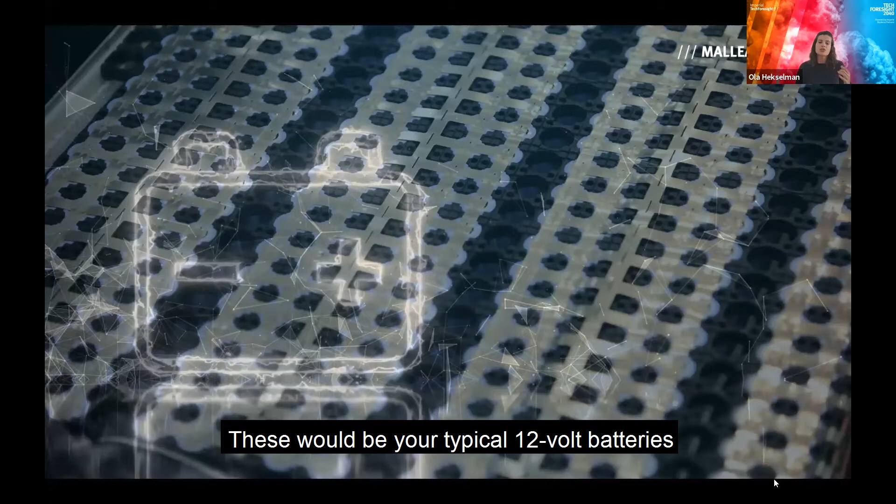So about 2 years ago, I started looking for comparable examples of battery recycling, and I came across lead-acid batteries. These would be your typical 12-volt batteries, which can be found in every internal combustion engine car. Interestingly enough, not many people would know that lead-acid batteries are also used in every state-of-the-art hybrid and electric vehicle.

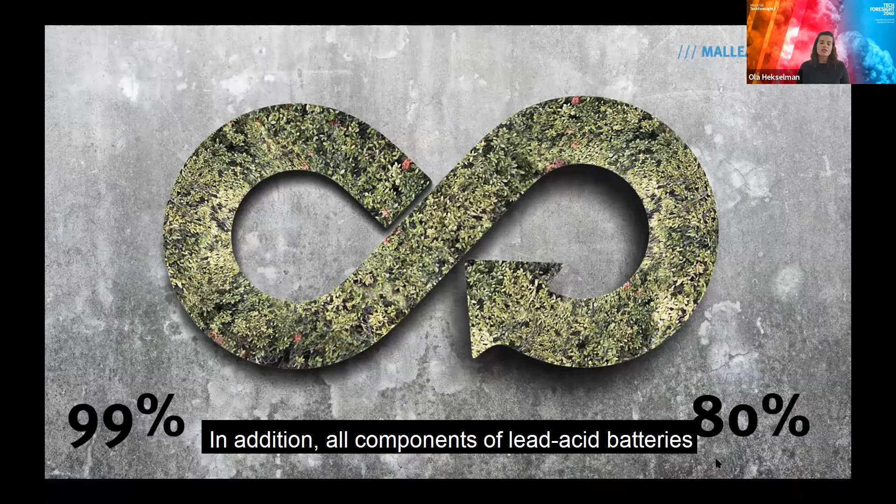Unlike with lithium-ion batteries, there is not much hype around lead-acid technology, mainly because it's been on the market for about a century. What is remarkable about this technology, however, is that 99% of these batteries are being collected and recycled at their end of life. In addition, all components of lead-acid batteries can be recycled and reused in a new battery. Did you know that 80% of your new car battery is made of recycled materials?

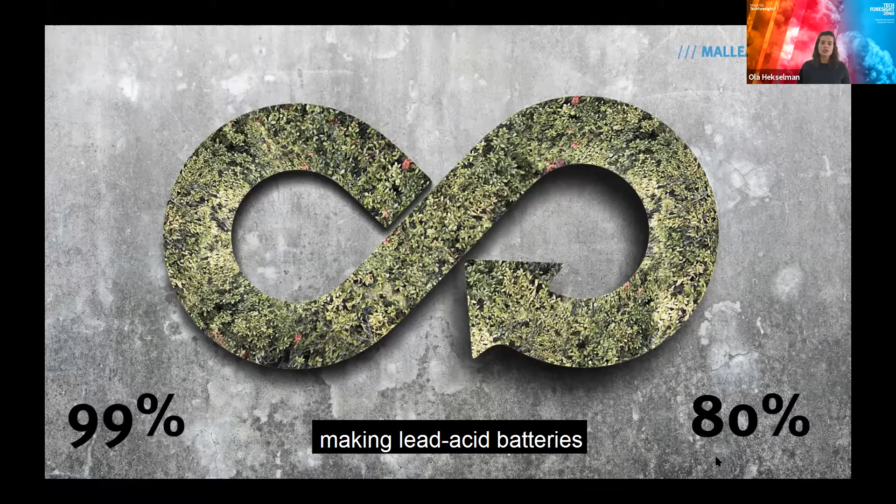This is outstanding, not only when compared to other battery technologies, but also in comparison to any other recyclable product. Their recycling rates exceed those of paper, glass, or aluminum cans, making lead-acid batteries the most recycled consumer product in the world. This is thanks to various factors: the infinite recyclability of lead, the cost of raw materials, the simplicity of the product, and the enforcement of environmental regulation.

This market is considered a perfect example for circular economy. But it is not free from issues and challenges. We all know that lead is highly toxic. Exposure to lead affects all organs in the body and often causes irreversible health issues. Long-term exposure to lead can be associated with cognitive impairment, behavioral problems, lower IQ, increased societal violence, and lower life expectancy.

Today, human exposure to lead comes primarily from informal recycling of lead-acid batteries in low and middle-income countries. And it is estimated that up to 30% of children around the world might be suffering from lead poisoning. For that reason, informal lead recycling is considered the most polluting industrial process in the world.

The existing method of recycling of lead-acid batteries includes crushing, separation of materials, and smelting. Smelting is a high-temperature combustion process done at 1100 centigrade, and it is the most energy-intensive and polluting step in the whole recycling process. It is also the most expensive step, because if it's done properly, it may cost companies up to 40% of their annual expenditure just to comply with environmental regulations. At present, there is no industrial recycling process on the market that is both cheap and environmentally friendly.

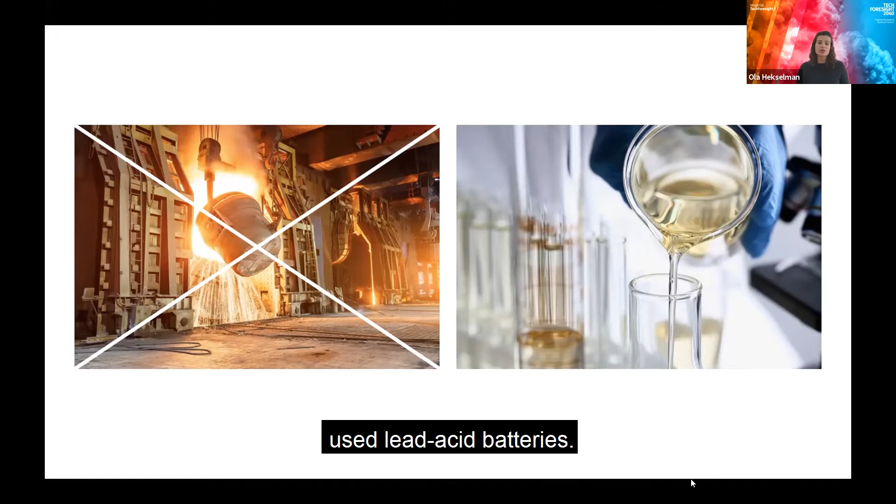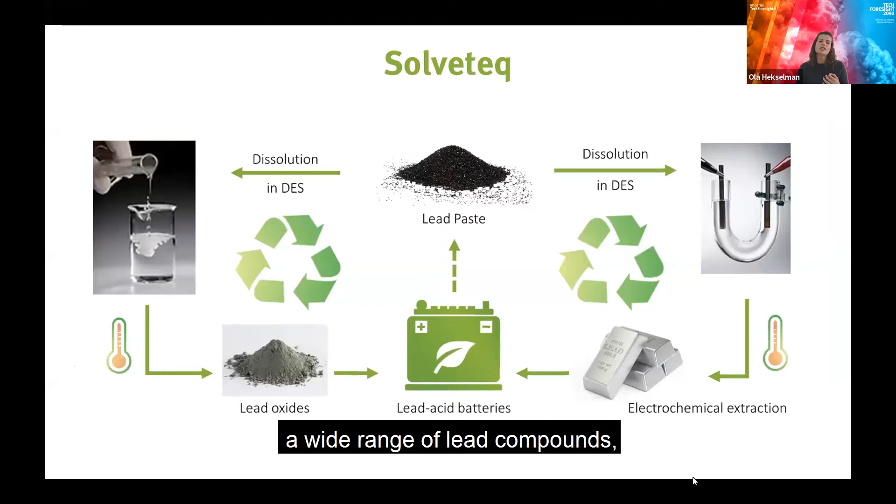Deep eutectic solvents are composed of low-cost, easily available, and benign chemicals, such as ethylene glycol. They have a low environmental impact and are easy and safe to handle. Most importantly, they have the ability to dissolve a wide range of lead compounds, including components of used lead-acid batteries, which are otherwise difficult to dissolve, or are even insoluble in other liquid media.

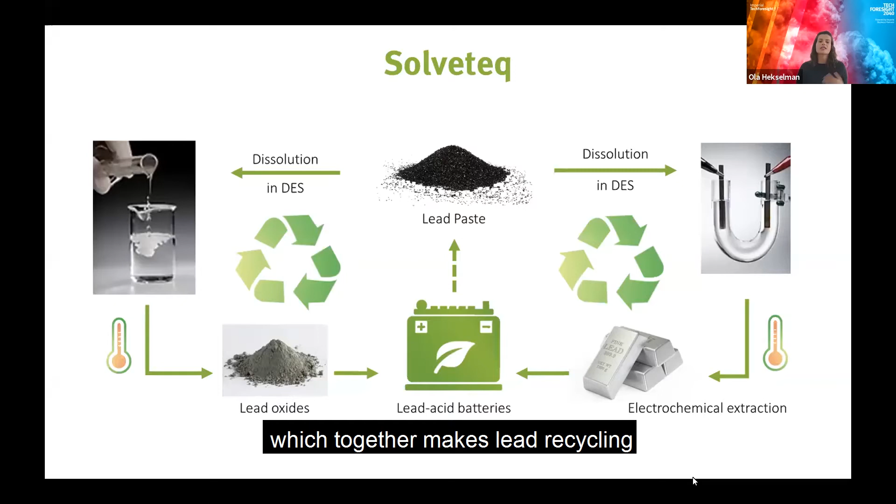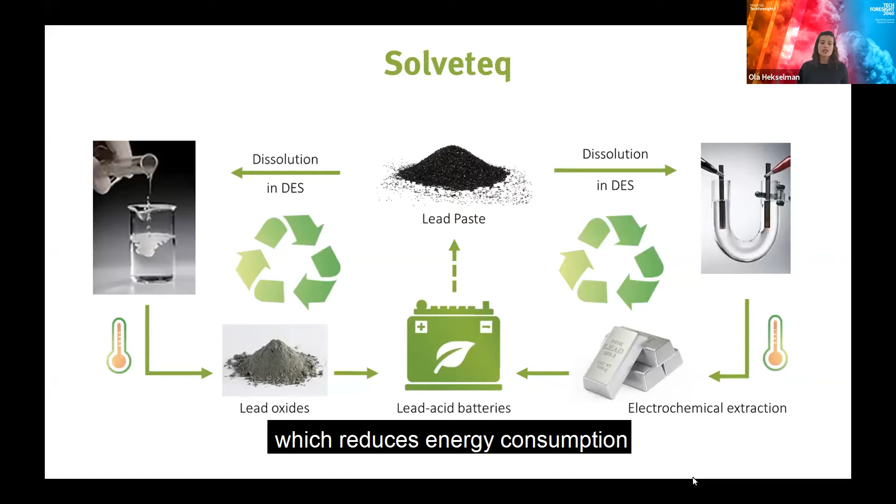Our process is solvent-based, so we produce significantly less hazardous air pollutants during the process. We also significantly reduce CO2 emissions, which together makes lead recycling more environmentally friendly. We also move from smelting at 1100 degrees to temperatures as low as room temperature, which reduces energy consumption and makes the entire process much cheaper than smelting. Finally, we are also faster because we require fewer steps to produce lead products that can be used in new lead-acid batteries.

As I said, there is no lead recycling process on the market that is both cheap and environmentally friendly. But our technology has potential to address this environmental, societal, and economic issue. To fully maximize impact of our research at Imperial, my colleagues and I decided to set up Solveteq, a spin-out company dedicated to the commercialization of this technology.

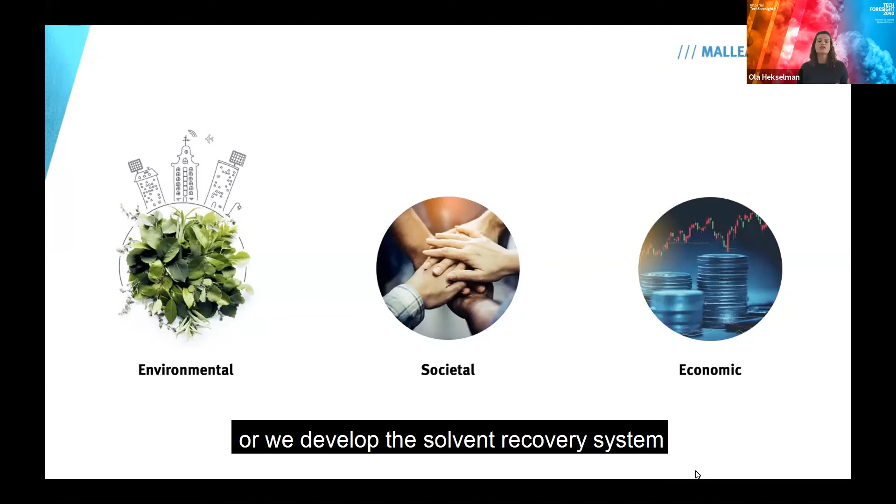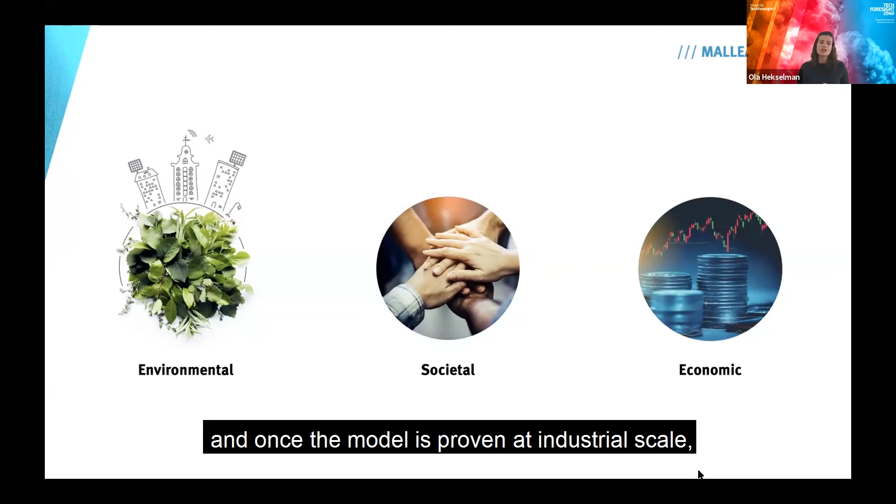We work very closely with established industrial partners, recycling experts, and our future customers to meet commercial requirements. And this is a very exciting part of the journey for our team because it gives us an opportunity to look at our process beyond the laboratory scale. We analyze the economics of our process, or we develop the solvent recovery system to minimize the production of chemical waste. Currently, the technology is at the prototyping stage, and once the model is proven at industrial scale, the technology will be deployed worldwide.

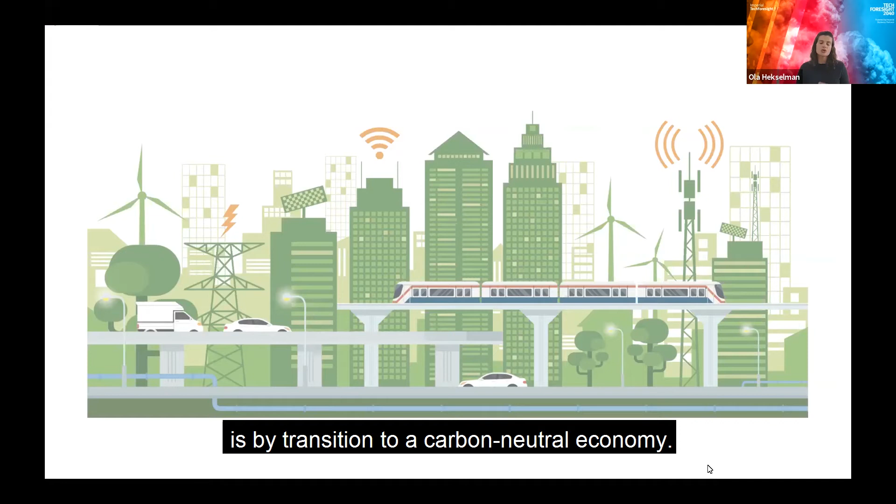And while this is already greatly exciting, the future is even more interesting. It is widely recognized that climate change is the most serious and threatening global environmental problem. One of the ways this challenge can be addressed is by transition to a carbon neutral economy. And an increasing number of countries and organizations are already targeting net zero emissions by 2050 or even earlier.

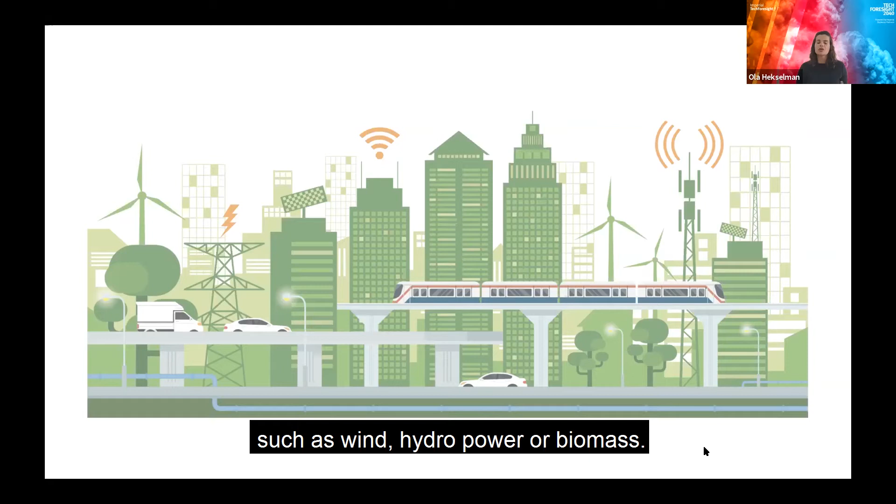From a wider economy perspective, this can be done, for example, by moving away from fossil fuels to electricity generated from renewable energy sources, such as wind, hydropower, or biomass. Another option is reduction of greenhouse emissions generated by our transport system. EVs are a great option for reducing our carbon footprint in comparison to standard petrol or diesel engines.

The electric vehicles market has grown steadily in the last few years, reaching sales of 2.5 million units in 2019, which is slightly less than 3% of total vehicle sales. However, the real takeoff for EVs is expected to happen from the second half of the 2020s, when electric cars are expected to become cheaper to own than internal combustion engine models.

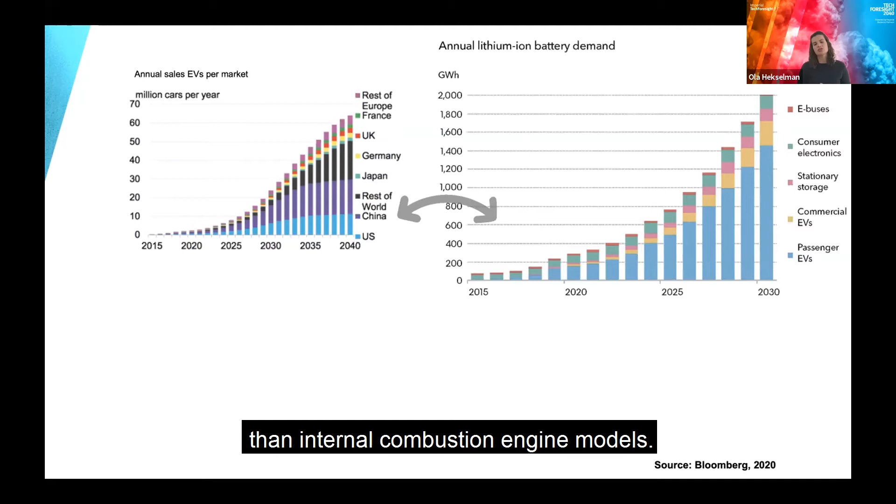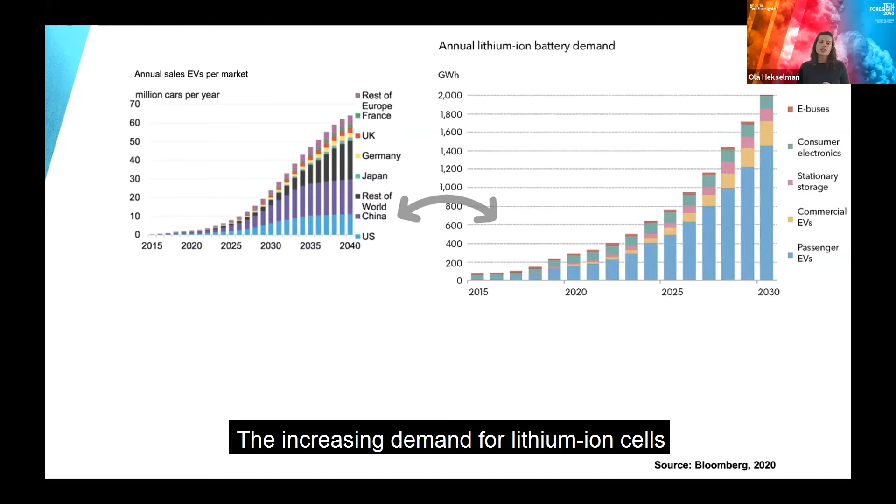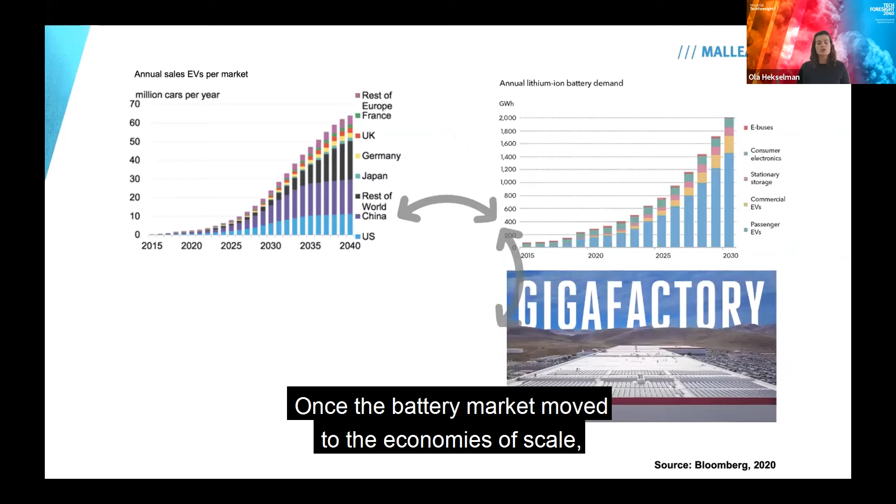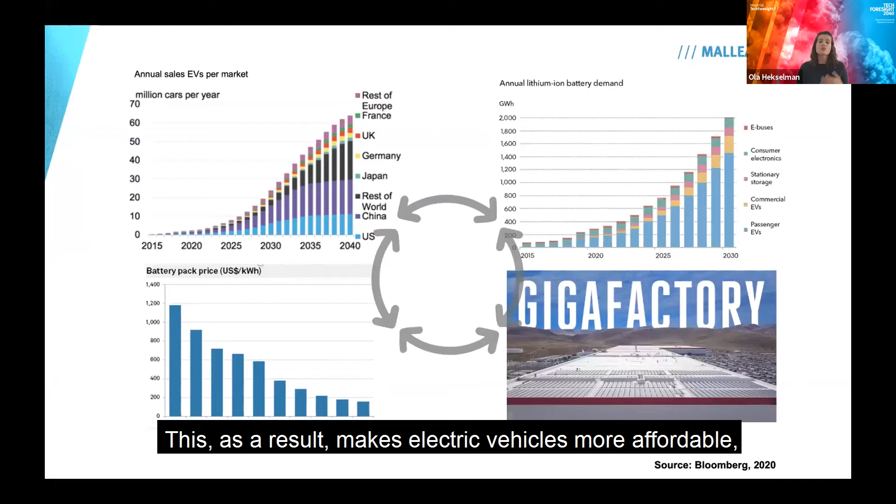The electric vehicle revolution is responsible for surging battery demand. Today, the size of the lithium-ion market is driven by expansion of the plug-in hybrid and electric vehicle market. The increasing demand for lithium-ion cells is met with an increasing number of gigafactories, which are built around the world. Once the battery market moved to the economies of scale, we started to observe the drop in battery prices. This, as a result, makes the electric vehicles more affordable, which then further increases demand for batteries.

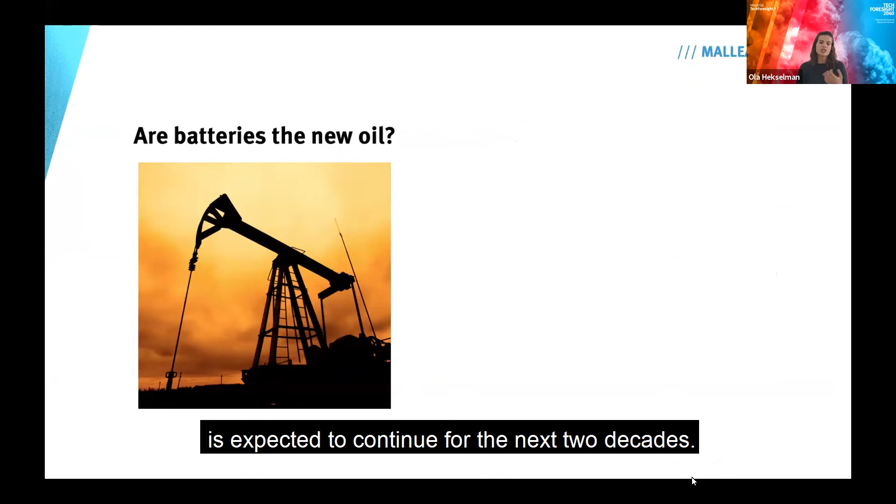This spectacular success of batteries and electric vehicles is expected to continue for the next 2 decades. This unprecedented demand can be only compared with the demand for oil in the 1910s and 1920s. One could ask then if batteries are the new oil. However, this success also puts an enormous strain on the entire supply chain. To meet this demand, we will need to produce more and more batteries. But we only have a finite amount of resources. If we continue expansion at this speed, we will soon run out of raw materials such as lithium or cobalt.

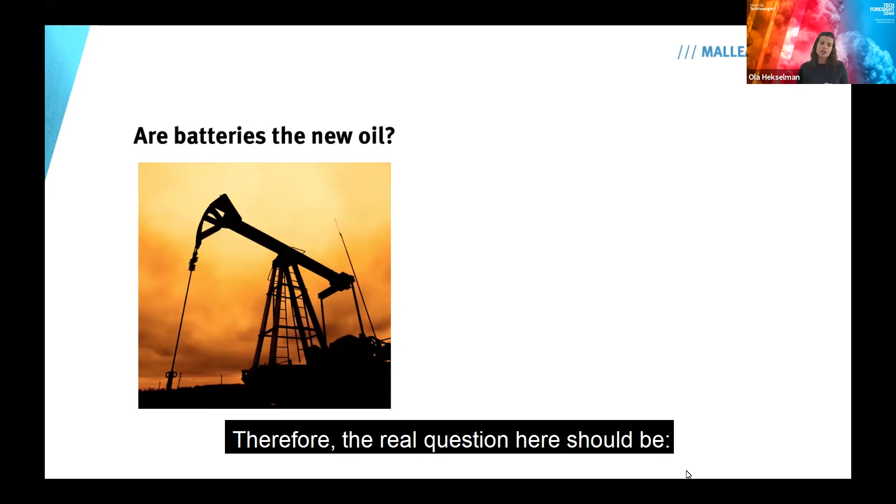Therefore, the real question here should be, are batteries the new oil or the new plastic? The answer to this question is around sustainability. We have to build our sustainability map for lithium-ion batteries, and we have to build it now. And we all have a role to play here, starting from us, material scientists, engineers, car manufacturers, regulators, all the way to all of us consumers. We can contribute to making batteries more sustainable.

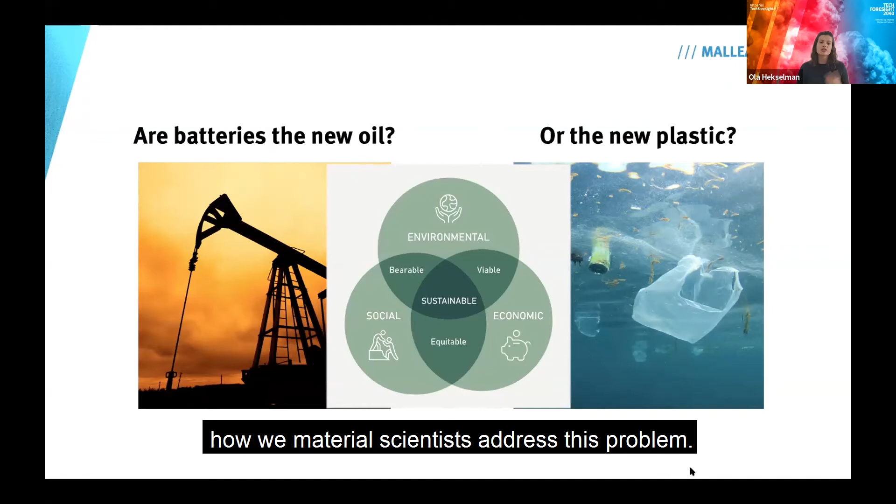For the last few minutes, I will share with you how we material scientists address this problem. First and foremost, we shall make our batteries safer, more efficient, and last longer. For the first example, I've chosen a material that is responsible for making battery headlines in the last few weeks. It is a cathode material called NMC, which stands for lithium nickel manganese cobalt oxide.

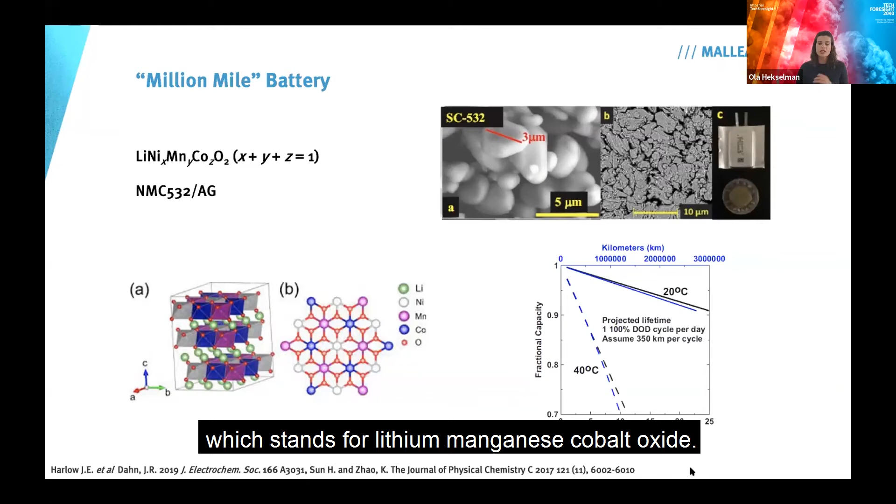These materials have a layered crystal structure, which allows a facile intercalation and deintercalation of lithium ions upon charge and discharge of the battery. The original layered material here was lithium cobalt oxide, and it was successfully used early on in small portable electronics. However, cobalt is more expensive and less abundant than other transition metals. Cobalt also presents political and ethical issues because of the way it is mined in Congo.

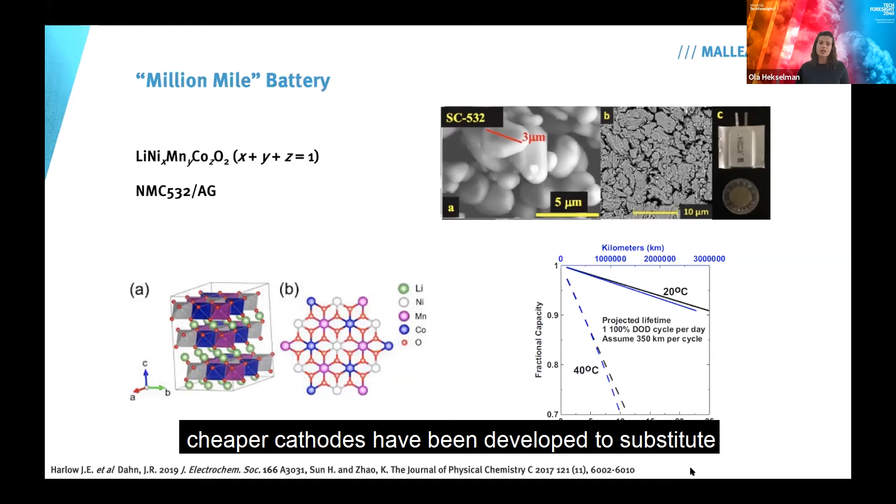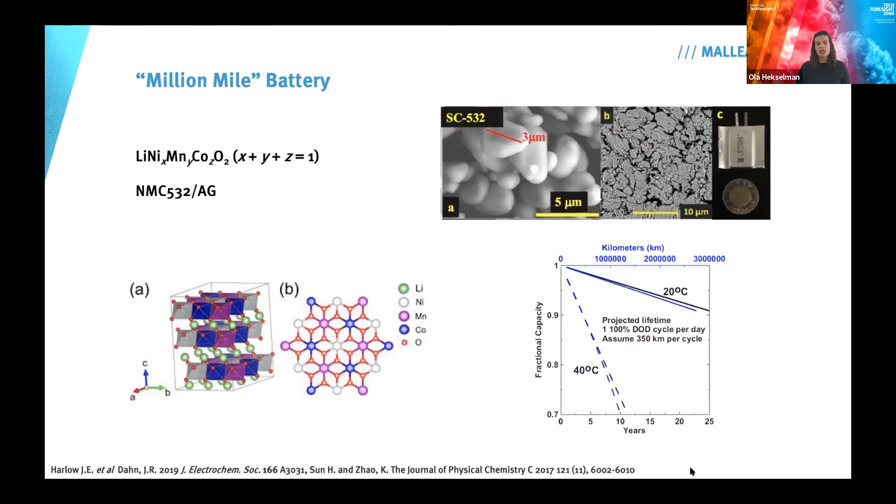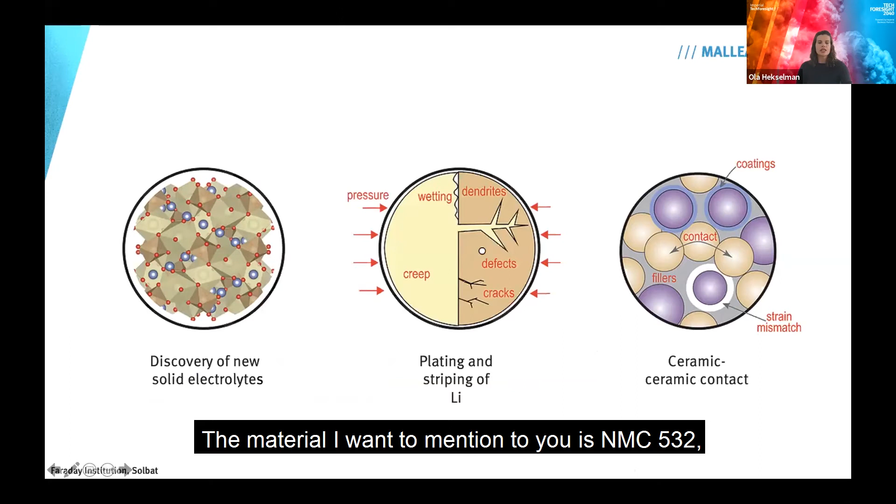As a result, cheaper cathodes have been developed to substitute some of the cobalt with nickel and manganese. These are used in the majority of lithium-ion batteries in electric vehicles, due to their high specific capacity, ease of production, and moderate cost. The material I want to mention to you is NMC 532, where 5, 3, and 2 correspond to atomic ratios between nickel, manganese, and cobalt.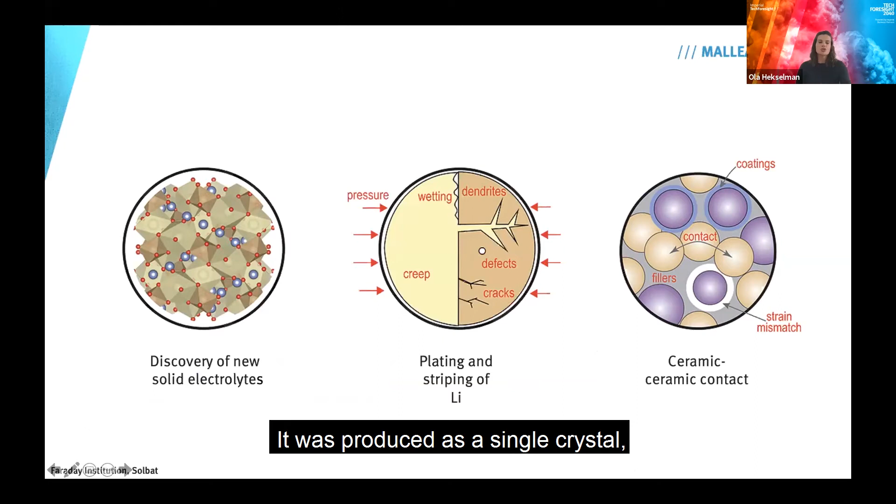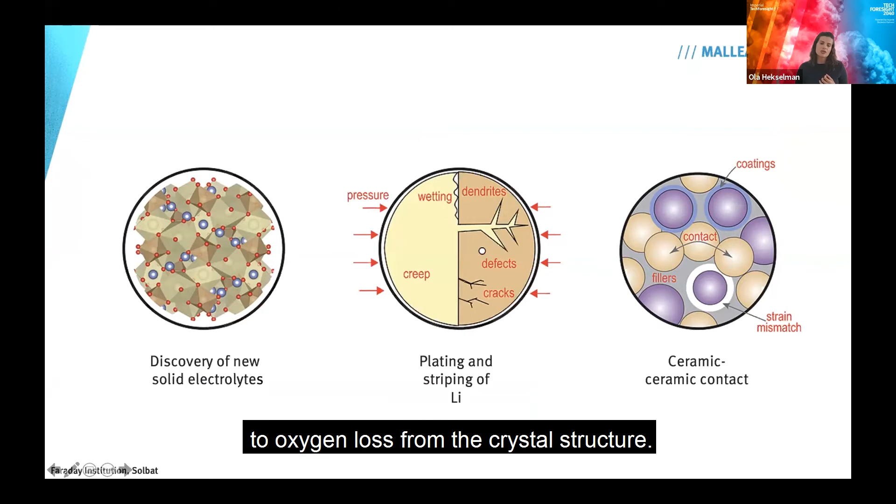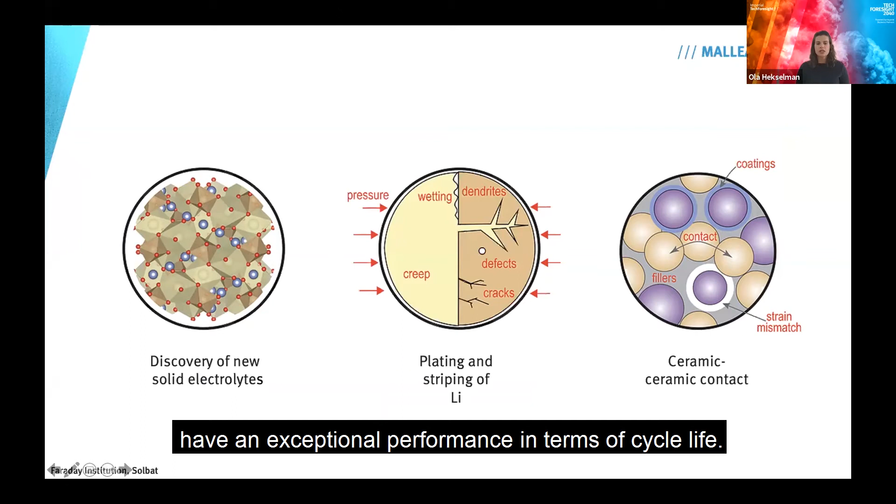It was produced as a single crystal, unlike other cathode materials, which are typically polycrystalline. This made NMC 532 extremely resistant to oxygen loss from the crystal structure, and as a result, lithium-ion cells with NMC 532 have an exceptional performance in terms of cycle life. These new batteries would last for over 16 years and over 1 million miles. This work was done by Professor Jeff Dahn and his group from Dalhousie University in Canada. Jeff is also known for his close collaboration with Tesla, which announced that they will be implementing a game-changing battery technology later this year.

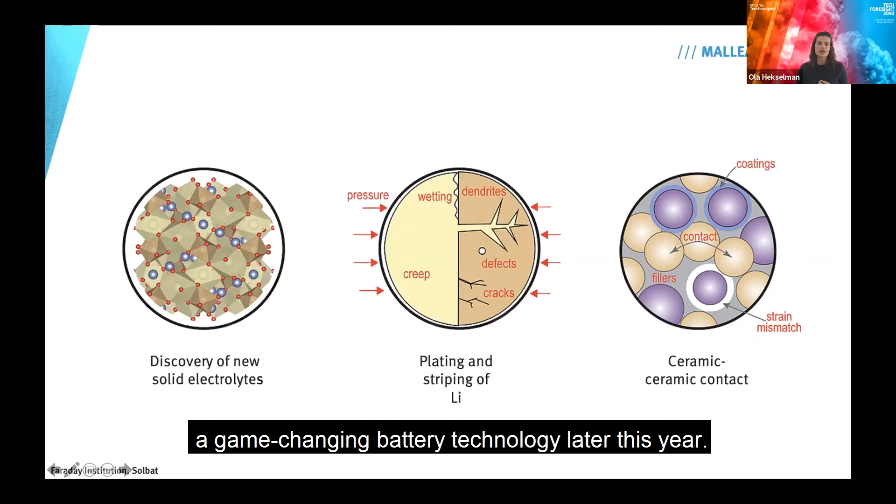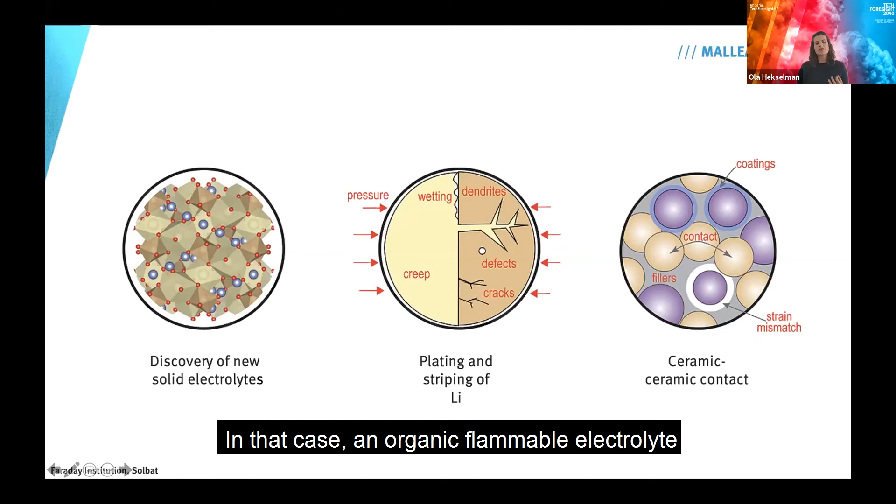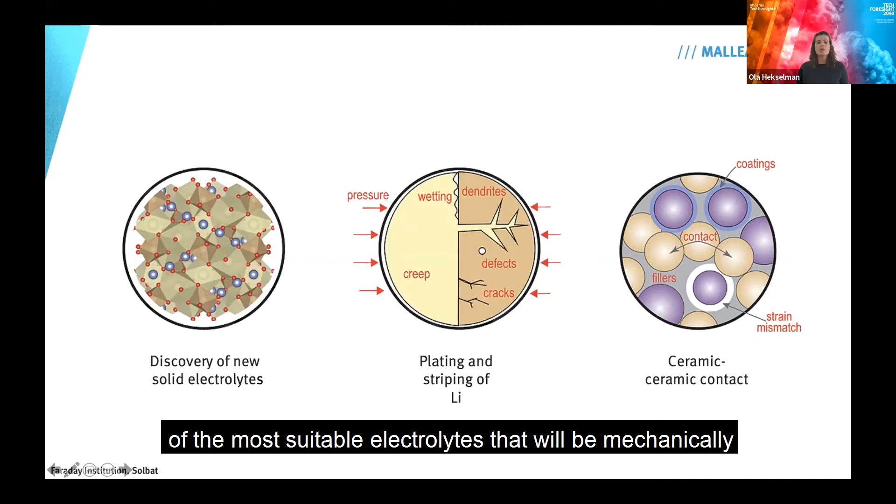Another example of making batteries more sustainable would be solid-state batteries. In that case, an organic flammable electrolyte and graphite-based anode would be replaced with a ceramic electrolyte and a lithium metal anode. This would increase the range of the battery and address the safety concerns. Currently, research efforts are focused on discovery of the most suitable electrolytes that will be mechanically and chemically stable with lithium metal, and will provide intimate contact with the active cathode material upon charge and discharge.

But actually, I'm not sure if it's changing.

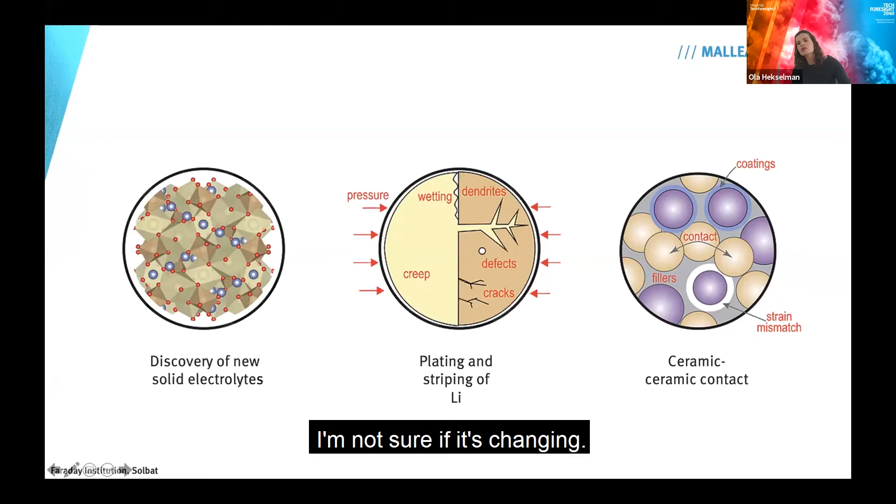Okay, great. But actually, there is already a battery technology on the market that works with metallic lithium. This is the lithium sulfur battery, where an anode is made of lithium and a cathode comprises elemental sulfur. Both lithium and sulfur are extremely light materials, delivering high energy batteries. This is suitable for applications where weight is critical, for example, aerospace. Moreover, sulfur costs approximately $200 per ton, which is much cheaper than cobalt, for example. It is also much safer to work with, and there are no heavy elements involved, which positions this technology strongly on the sustainability scale.

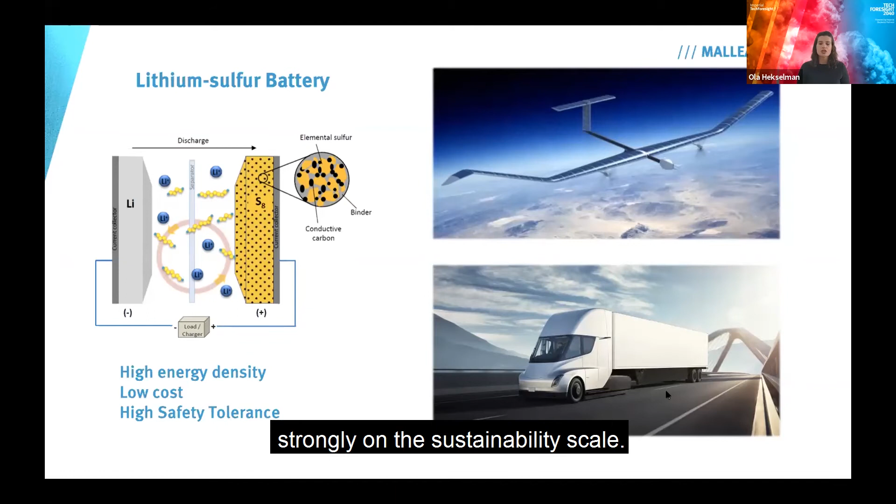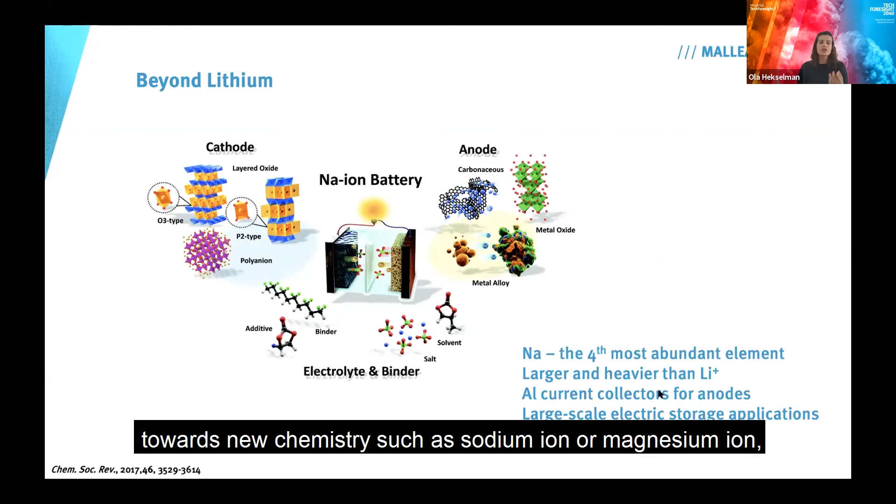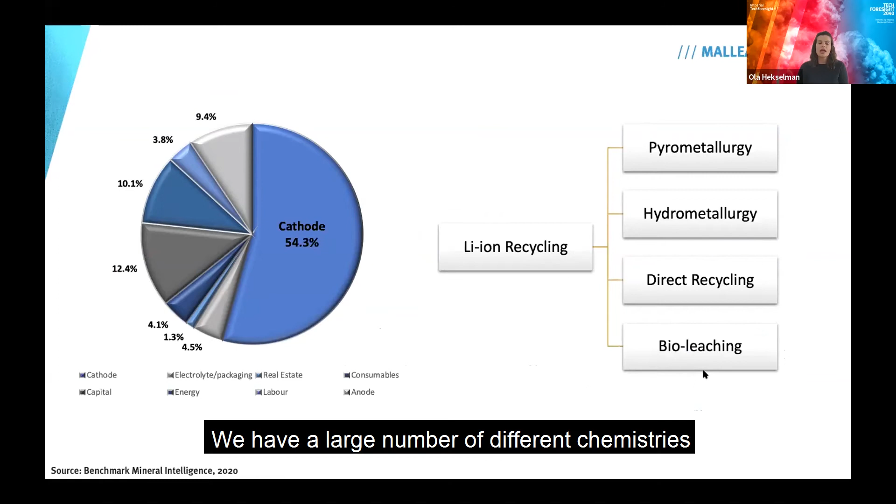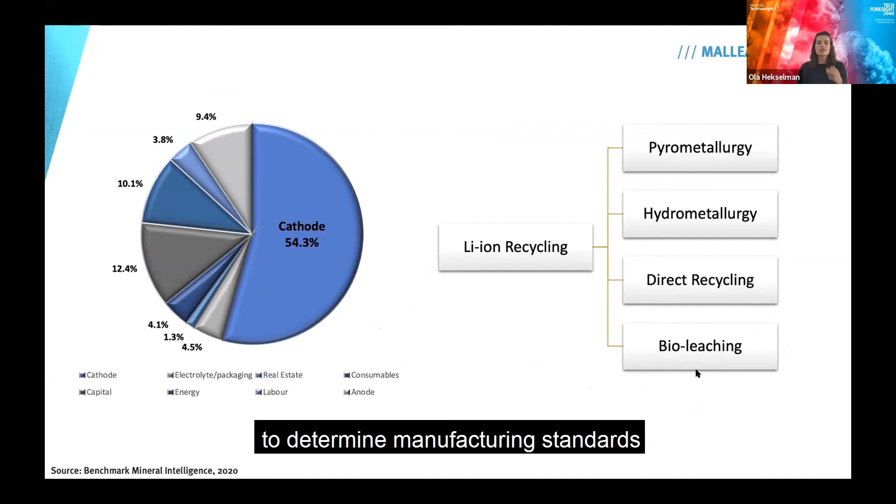Then, we also have to look beyond lithium and lithium-ion. There is currently a lot of work done towards new chemistries, such as sodium-ion or magnesium-ion, where materials are cheaper and more abundant. And of course, the sustainable recycling of batteries at their end of life. However, this is extremely difficult to establish at this point in time. We have a large number of different chemistries on the market. Elemental composition of batteries varies greatly, and there is no sufficient legislation in place to determine manufacturing standards, collection, or recycling. But for the time being, the clues are in the cost of lithium cells.

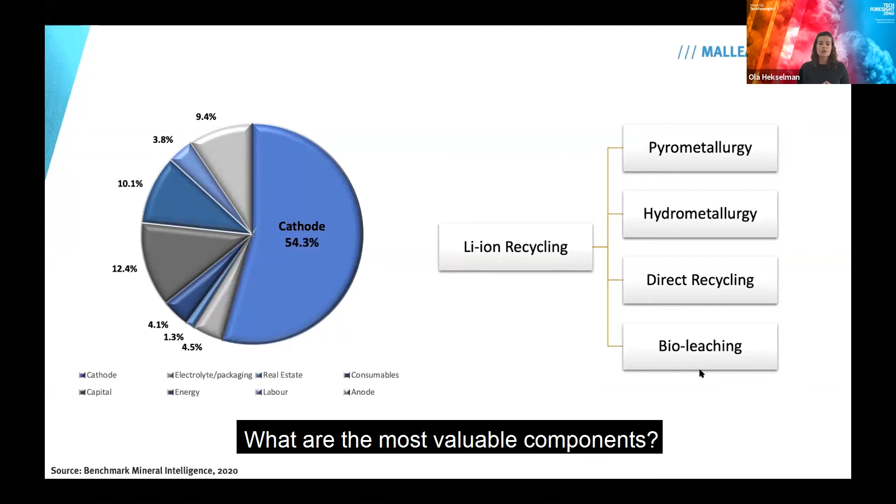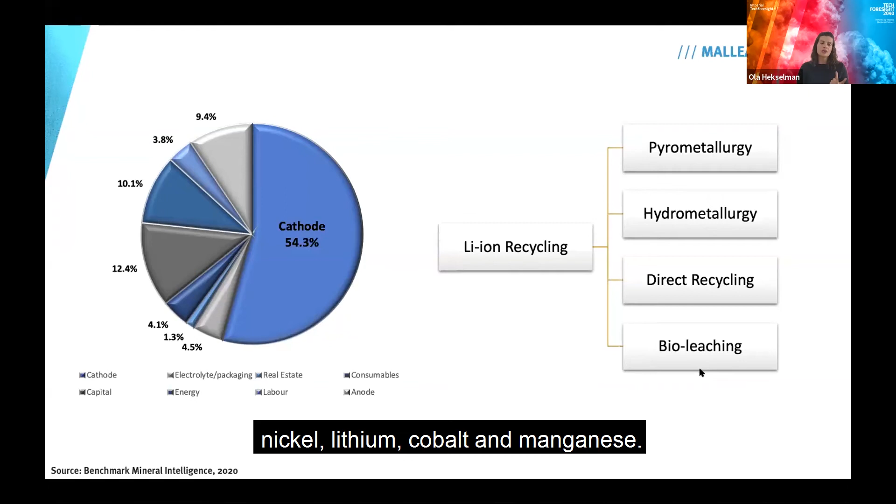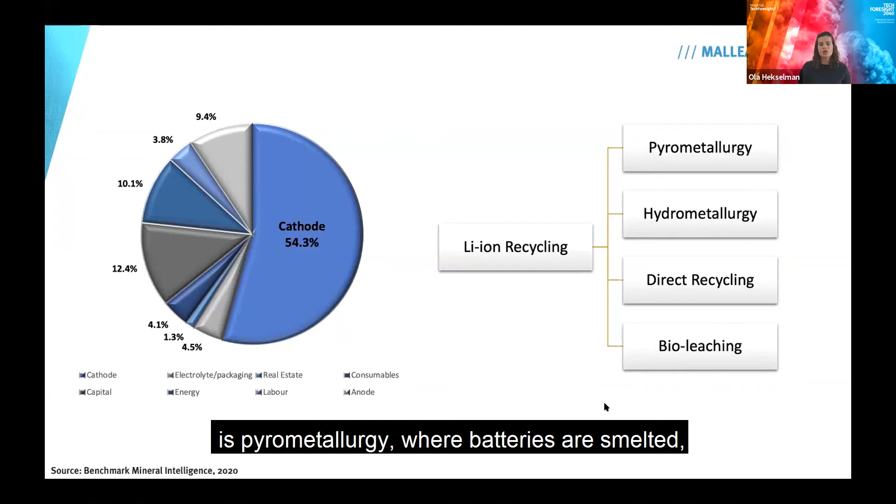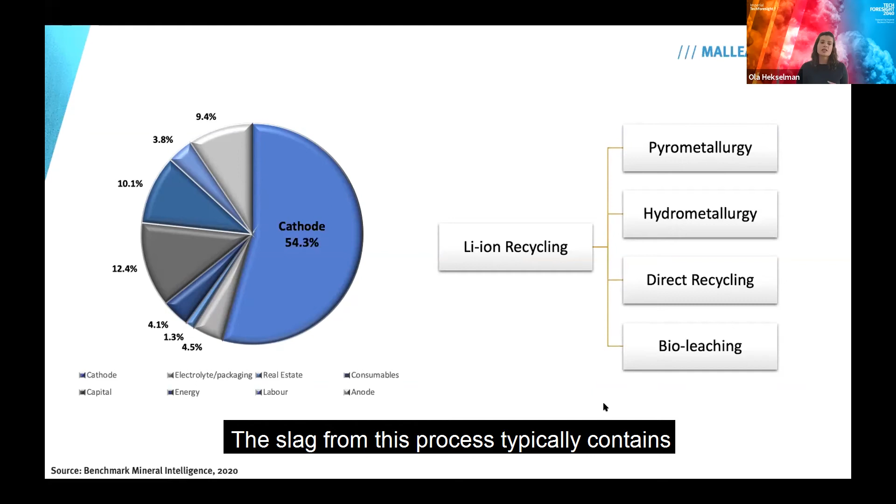What are the most valuable components? From this breakdown, one can see that over 50% of battery value is in its cathode materials: nickel, lithium, cobalt, and manganese. Not surprisingly, the most advanced method of lithium-ion recycling today is pyrometallurgy, where batteries are smelted and produce alloys of copper, cobalt, iron, and nickel. The slag from this process typically contains aluminium, manganese, and lithium, which can be reclaimed by further hydrometallurgical processing. But electrolytes, plastic, and lithium salts are usually lost in the process.

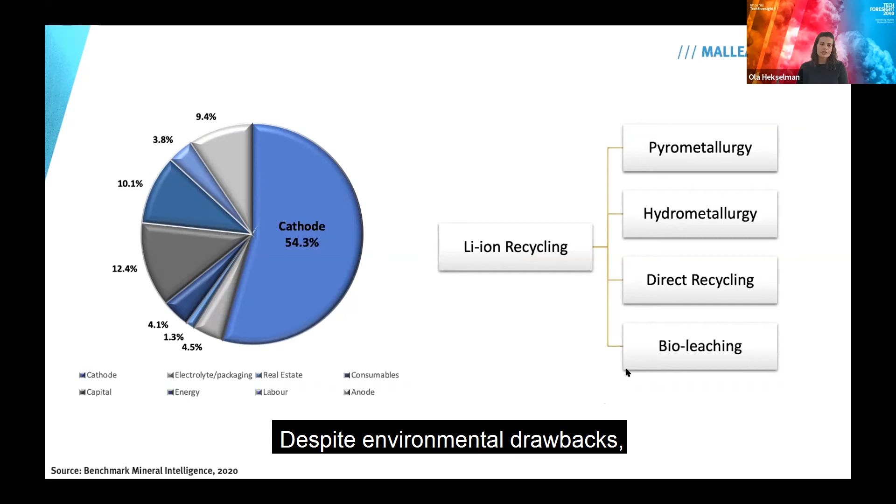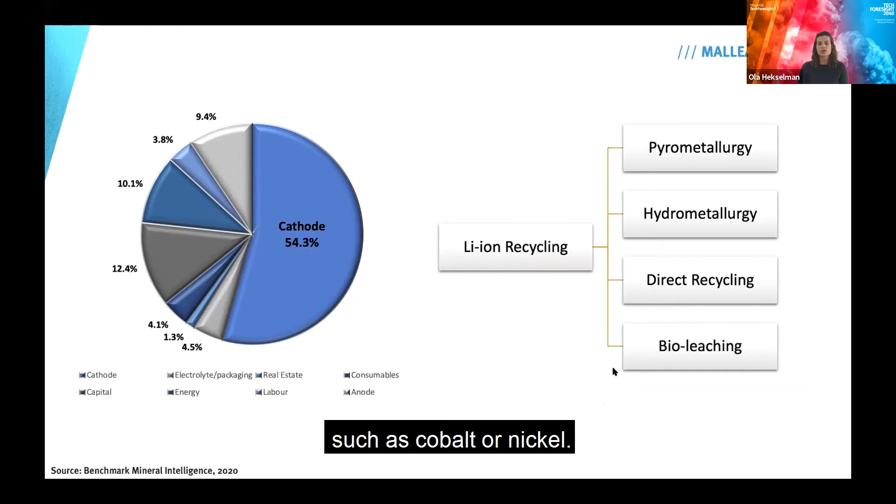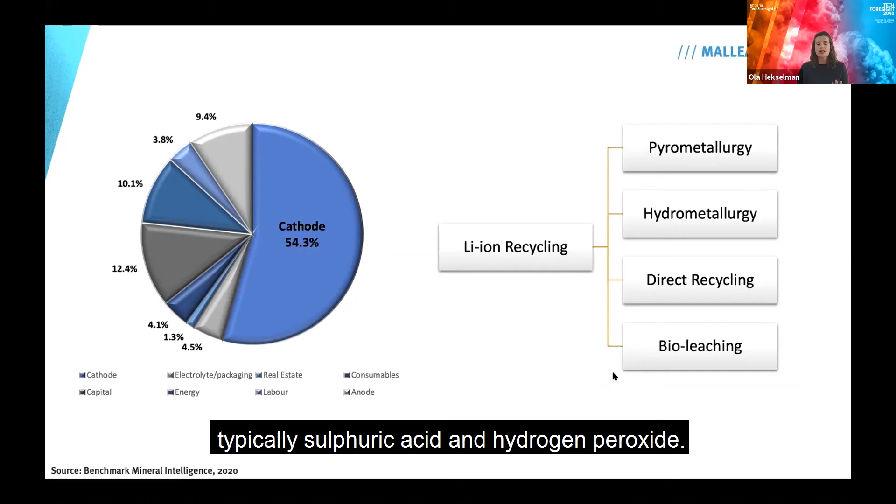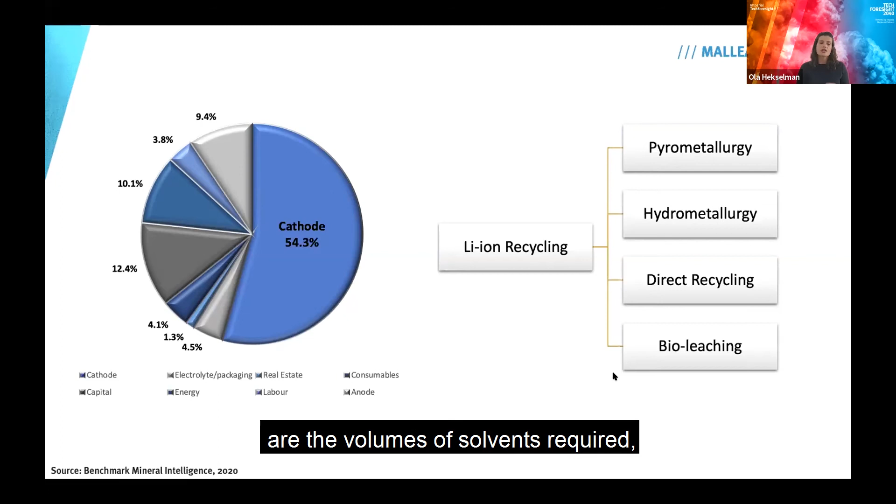Despite environmental drawbacks, high energy costs, and the limited number of materials reclaimed during pyrometallurgy, this is a frequently used process to reclaim high-value transition metals such as cobalt or nickel. Hydrometallurgy involves the use of aqueous solution to leach metals from cathode materials, typically sulfuric acid and hydrogen peroxide. Subsequently, metals go through precipitation reactions to recover cobalt and lithium, or transition metals, or NMC. The big issues to be addressed with all hydrometallurgical processes are the volumes of solvent required, the speed of delamination, the cost of neutralization, and the likelihood of cross-contamination of materials.

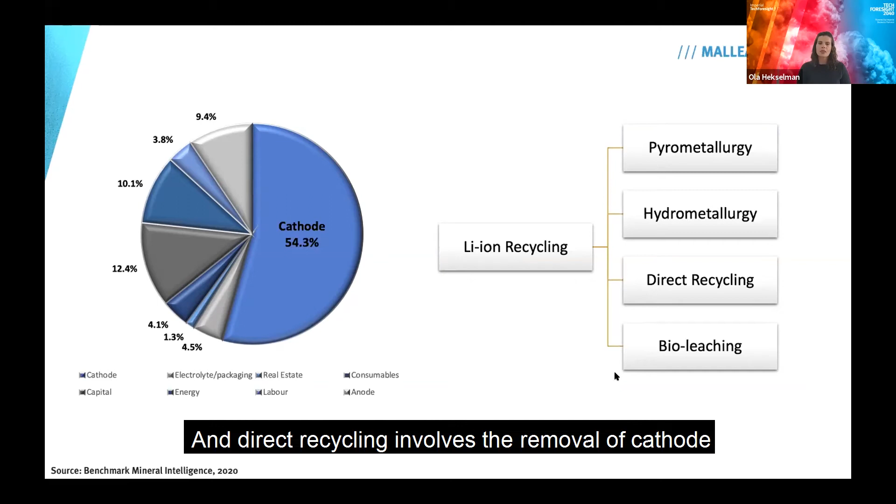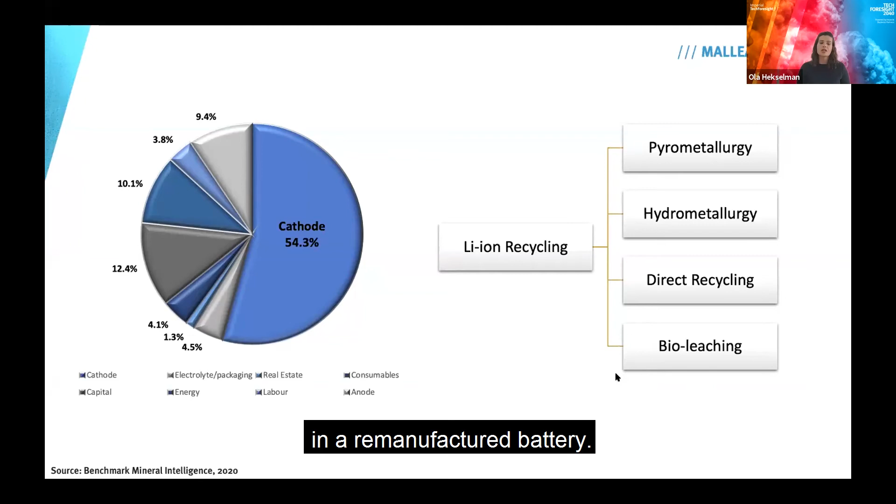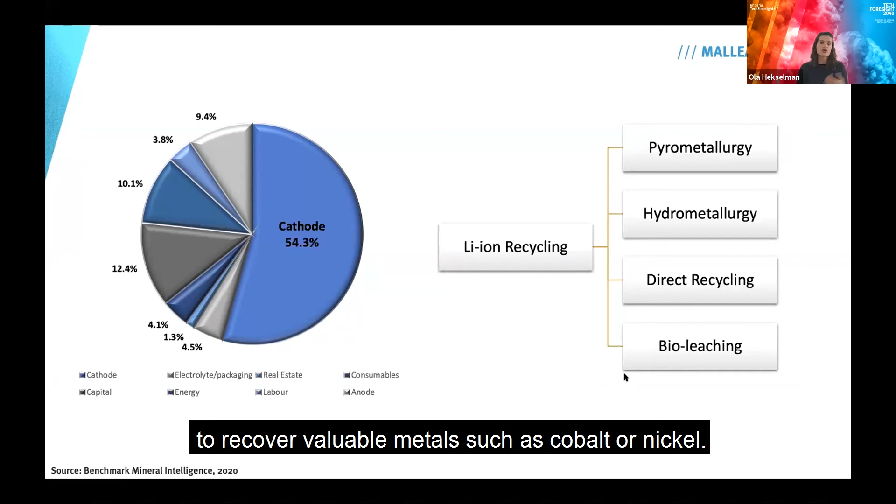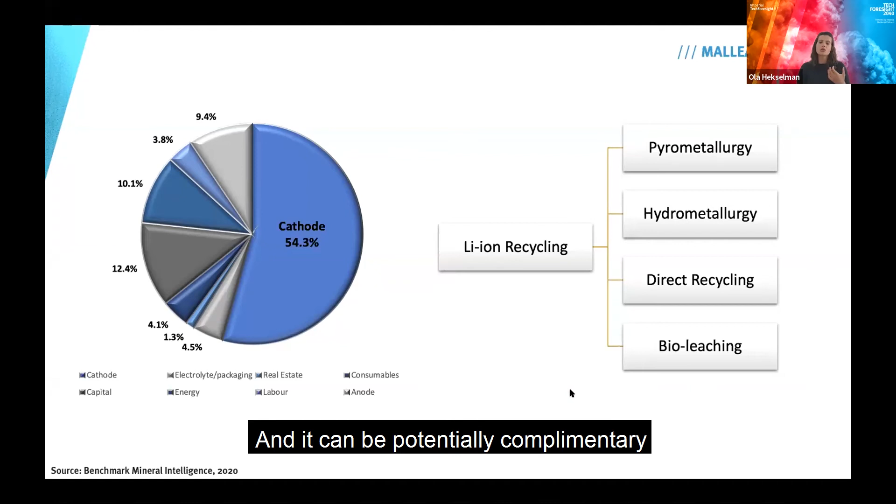And direct recycling involves removal of cathode or anode material from used batteries, followed by reconditioning and reuse in a remanufactured battery. For example, after dismantling used batteries, cathode strips could be delaminated in a solvent, powders could be recovered and regenerated, and lithium content could be replenished to compensate for losses during battery use. And finally, bioleaching. It's a method in which bacteria are harnessed to recover valuable metals, such as cobalt or nickel. This is a relatively new method, but has been successfully used in the mining industry, and it can be potentially complementary to pyro- and hydrometallurgical processes.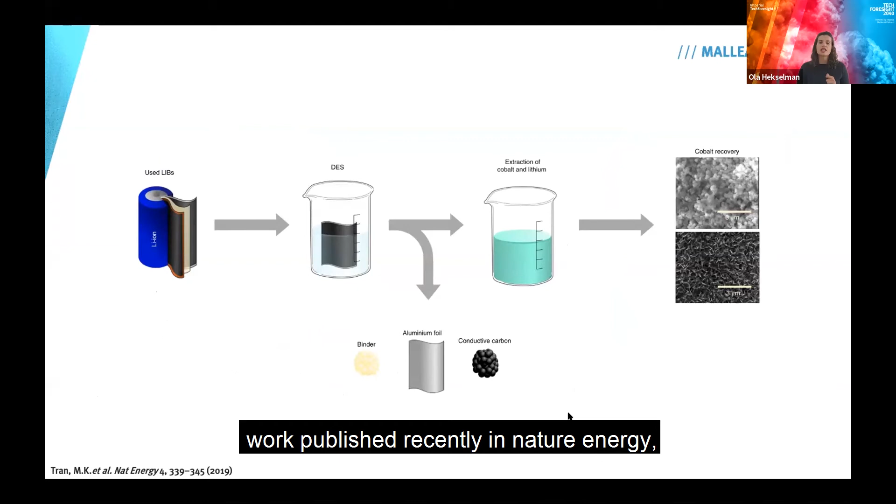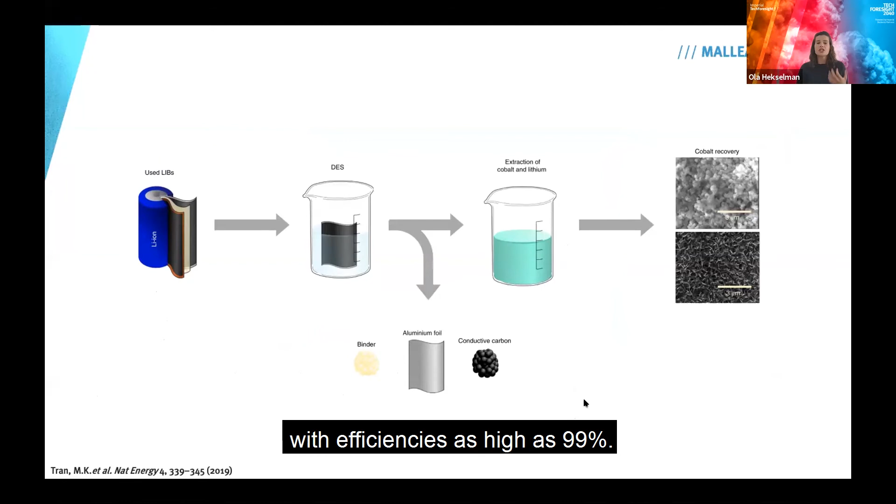On this slide, I just want to share with you work published recently in Nature Energy, where deep eutectic solvents were used to successfully recover lithium cobalt oxide from used lithium-ion batteries, with efficiencies as high as 99%. Similarly to our work with lead acid, they also showed that it is possible to recover and reuse the solvents.

So how will the sustainable battery market look in 2040? EVs will make up the majority of new car sales worldwide, but we should be prepared to be using air taxis by then. For every terafactory, there will be a tera recycling plant. Our batteries will be made from recycled materials, and if it's not possible, from materials that will be ethically sourced.

We will have a range of battery technologies with their chemistries optimized for different applications, whether it is transport, stationary energy storage, or wearable electronics. The battery cells, packs, and modules will be designed to enable efficient disassembly, separation of components, and material recovery.

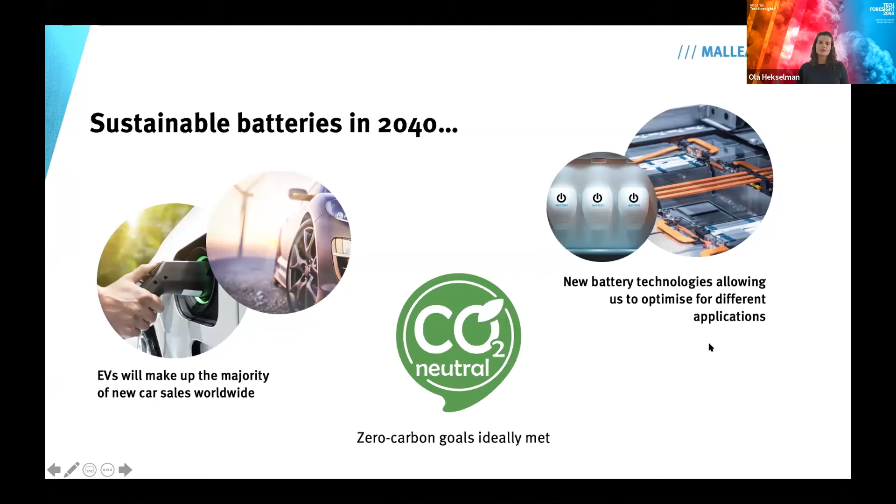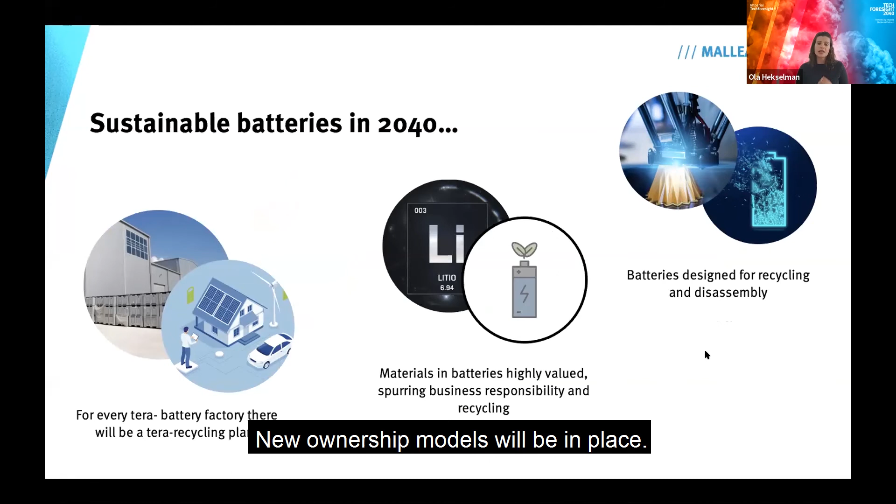Legislation-wise, there will be strict regulations about who is responsible for battery recycling. New ownership models will be in place. For example, we may only lease the EV battery pack from a car manufacturer, and they will determine whether the batteries will be repurposed at the end of life or recycled.

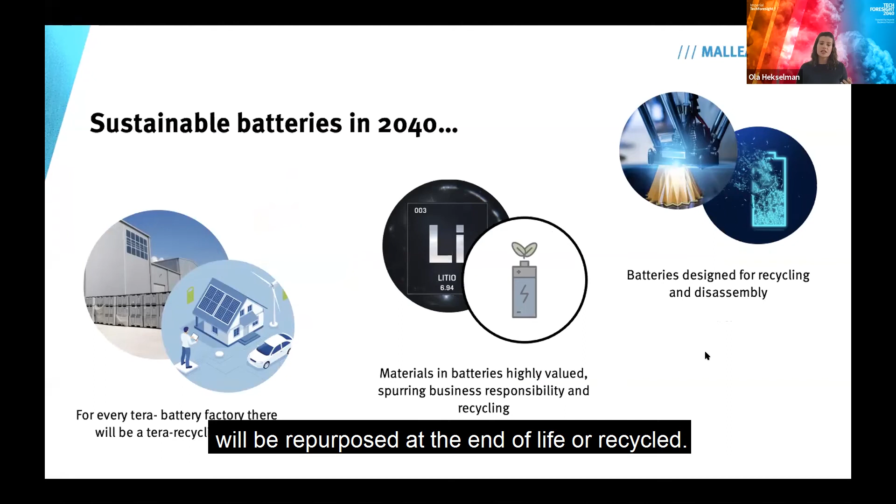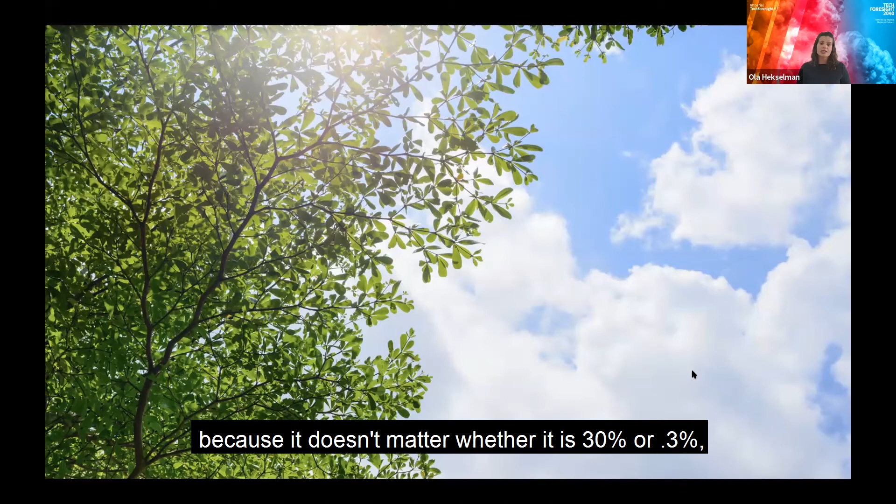And finally, coming back to lead recycling. I hope our technology will become a global standard for lead recycling, and we will eliminate lead pollution. Because it doesn't matter whether it is 30% or 0.3%, no children should be suffering from lead poisoning.

Hopefully, this talk highlighted for you how important sustainability in energy storage is, whether these are lead acid or lithium-ion batteries, and what the risks are of not preparing for it. At the end of the day, it is our responsibility, either as academics or Imperial business partners, to build a better world after the COVID-19 crisis. A world that is cleaner, more sustainable, more energy efficient, and more respectful of the climate.